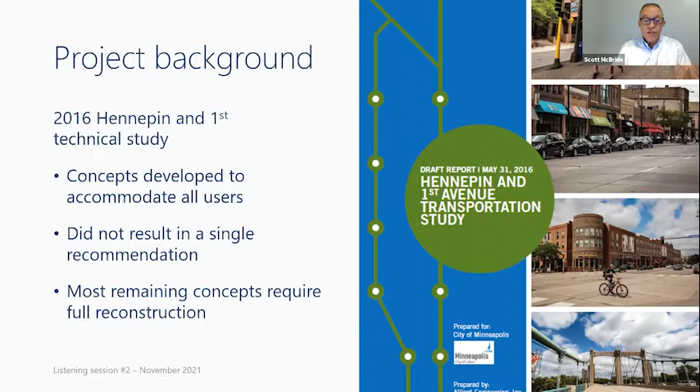Importantly, a lot of those concepts to do those full types of improvements would have required full reconstruction of both First and Hennepin in order to accommodate some of those bigger visions.

In 2018, the city and county moved forward with implementation of a bike lane on First and Hennepin. They requested and fortunately received $5.5 million in federal funding, looking at a 2023 fiscal year construction project. The scope of that successful funding application was to install bike lanes on First and Hennepin through this area, look at pedestrian improvements like bump outs, accessible pedestrian ramps, making sure it's ADA compliant, and look at traffic signal upgrades, replacing some of the aging traffic signals and including accessible pedestrian signals.

Importantly, the scope of this project that we're embarking on today is a retrofit. By that, I mean it's not a full reconstruction of the road. We will try to leave as much of the roadway intact as we can. It is to do these improvements: the bike lane, accessibility, and signal upgrades.

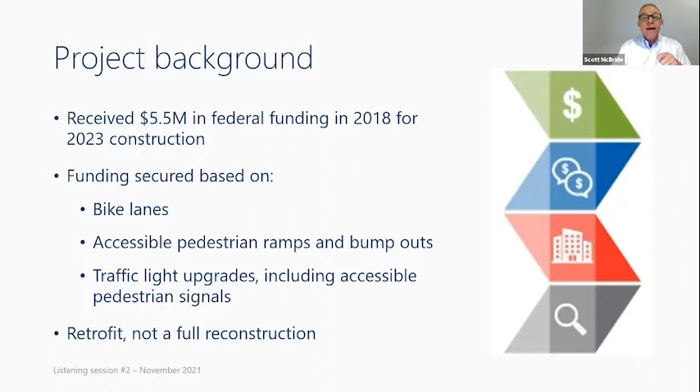So the project area that we're working in today, and that was part of that application, is First Avenue and Hennepin Avenue. You see the Mississippi River down on the bottom left corner of the photo, and in the top right where they come together is where First and Hennepin meet. The corridor area is on First Avenue and Hennepin Avenue from Main Street up to where it comes together, and then a little bit further to 8th Street.

I'm sure you all recognize that this really is quite a vibrant, robust corridor. It's really the gateway to Northeast and the northern suburbs coming out of downtown Minneapolis. There's a lot of local, regional, and statewide transportation connections that happen here, in all modes: walking, transit, biking, automobiles.

And since the last open house that we had, this is our second listening session, we've actually added an element. You see the yellow line down on Main Street at the bottom left of the map. In cooperation with the Park Board, Minneapolis Park and Rec Board, Hennepin County has agreed to undertake construction of the 'seam' project as part of this. There's a gap in the trail system in that one block stretch between First and Hennepin, and so we're currently working with the Park Board to add that to this project. I think that's a real benefit and a good example of cooperation between agencies to get something done.

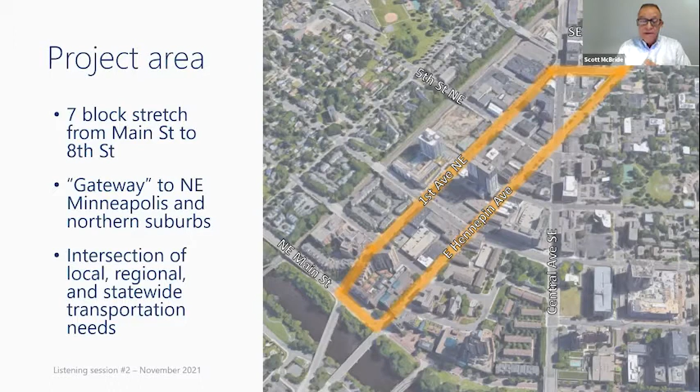So our project is more limited in scope than the 2016 effort, and that is to be consistent with the requirements of the Federal Highway Administration that administers the funding we've received for this project. We have explored a range of options that meet those requirements, but I do want to note that it is currently limited, again, because it's more of a retrofit project as opposed to a full reconstruction project.

We are launching right now about a 30-day engagement window where we'll tell people what the alternatives are, the two options that we have, and get feedback on those for the next 30 days. At the end of that, we'll look at selecting one of those alternatives based on that feedback, and then move into a little bit more preliminary design.

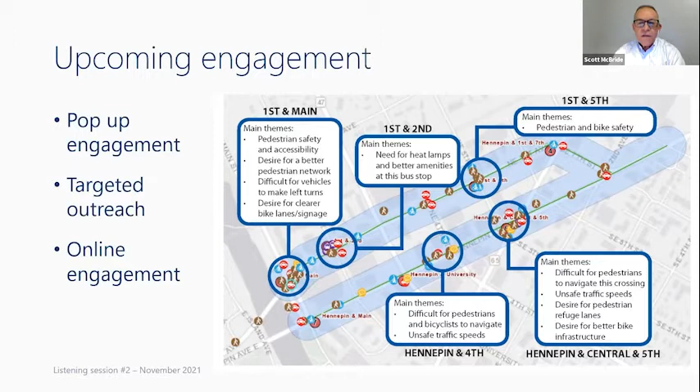No, looks like Haila froze. All right, looks like we lost her. I'm going to pull the presentation up and see if we can carry on. Okay, I think Haila got through that one.

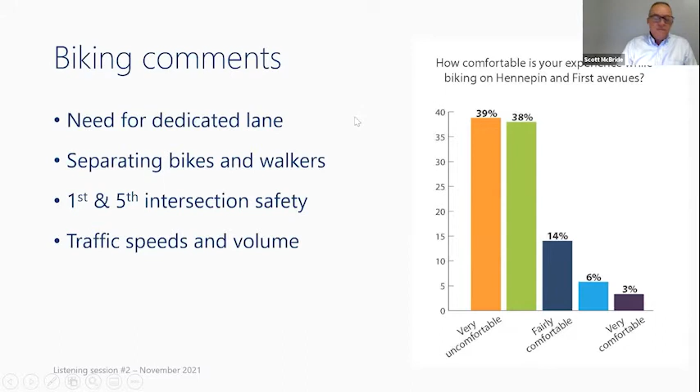Hey, Scott, for biking, are you back? I'm back, sorry about that, my internet must have dropped. It's wonderful you were able to jump in so quickly. No worries, you want to take over? Sure, I am sorry about that folks, I guess we had an internet hiccup here. Yes, that is life in the digital world indeed right now. Looks like there's a question in the chat, I'm sure someone can look at that.

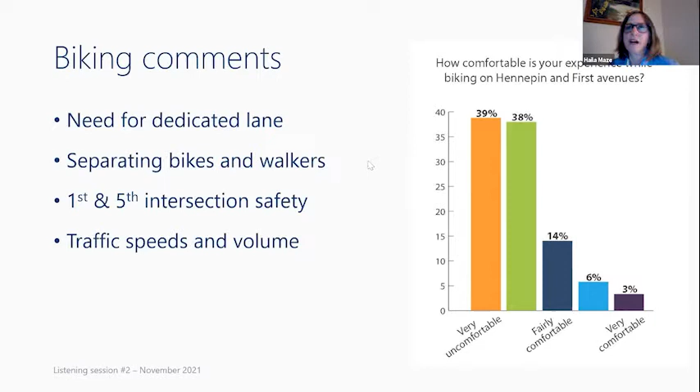I'll go ahead, as I think Scott ably jumped in and talked about walking comments. Likewise, we asked about comfort level and need for biking. One thing we found pretty consistently is nobody is super comfortable on this corridor, which doesn't surprise us. We heard consistently a need for a dedicated lane, for multiple reasons: bikes in traffic is unsafe, and bikes on sidewalks with pedestrians is also unsafe, more so for pedestrians than bicyclists. Separating bikes and walkers was key, especially in busy commercial districts. It's very common, as it is here, for bikes to be on sidewalks, even though it's technically illegal, due to safety concerns. We heard a lot about the 1st and 5th intersection, not just from bikes but also from pedestrians, being an unsafe intersection to navigate due to lack of traffic control, and uncertainties about traffic speeds and volumes also being a high consideration for people biking this corridor.

Driving comments: there's concern about bad sight lines, especially at the skewed intersections we'll talk about later. There's a need to ensure people have a good view when traveling through the corridor. Traffic flow and speeding are considerations, both speeds too fast and traffic operational issues with some signals at key intersections, which anyone who's driven through here can appreciate. Some confusion with intersections, especially around the triangle, and we have proposed solutions for that, along with traffic signal timing—it can be a little stop and go with various bottlenecks forming in the area.

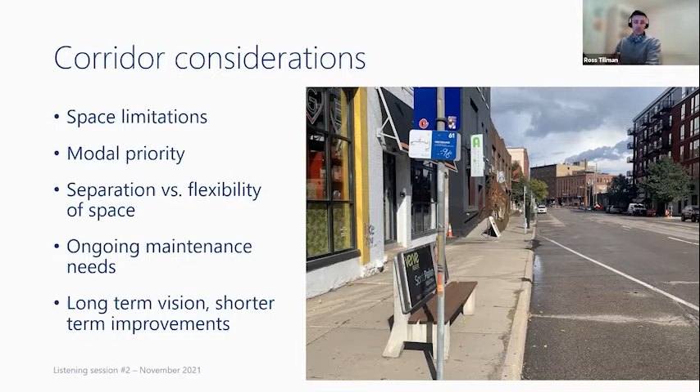From a corridor overall considerations perspective, these items probably shouldn't be a surprise to those of you who live in the area, but there's obviously space limitations in an urban area with different modal priorities. So we worked through how do we fit these different modes into the corridors, how do they work together, is there physical separation or more flexibility of use of space. We've considered ongoing maintenance needs as well. And a key thought has been thinking about what we can do now as a retrofit project, and how that project can not preclude other things from happening in the future.

The first is the one-way versus two-way roadway facility component. The key issue is how can one-way roadways be safe and livable? The two concepts we're sharing today retain the one-way paired roadway facilities, and we've thought about how to improve accessibility. Scott mentioned ADA and different pedestrian components. We're talking about adding a bikeway, and traffic calming certainly fits into that space of safety and livability.

So our concepts have narrow lanes. We're proposing removing some channelized right turns on First Avenue, and curb extensions where we can. Many of those improvements also address pedestrian safety. We also have a concept to share at the triangle intersection that checks that box as well. And then streetscape enhancements - that's an ongoing conversation, and right now we're looking for feedback from you all on what could be out here.

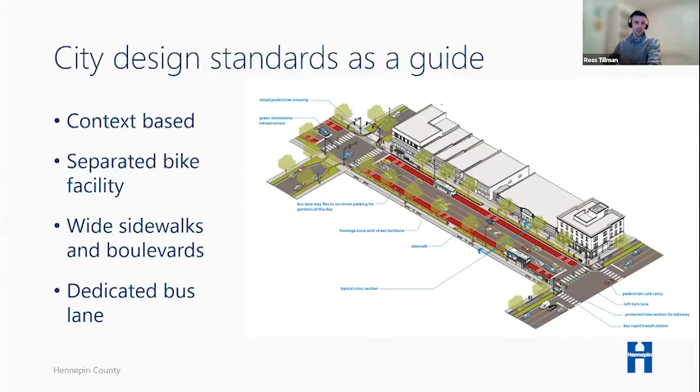The regional trail connection - Hyla mentioned this and Scott did too, I believe. Since we last met, an issue came up about completing a gap in the regional riverfront trail along the Mississippi River. Right now there's a gap along Main Street between First and Hennepin where that trail does not exist. So in partnership with the park board, this project is incorporating what's being called the seam connection. The intent is to include a two-way multi-use facility on the river side of Main Street on that block to provide regional and local connectivity and circulation.

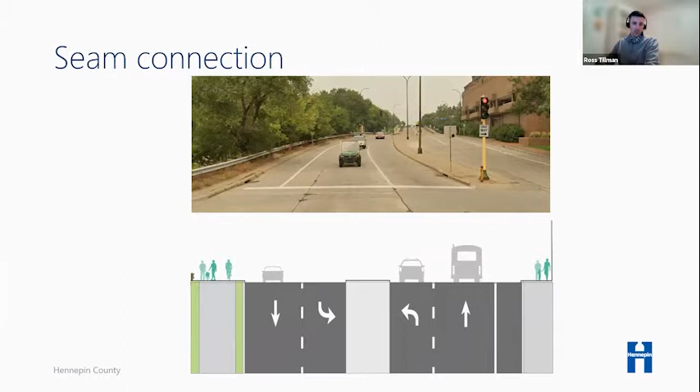Green infrastructure is another key topic - this is something we're considering now. We have some ideas on how to make the corridor greener and what those options could look like independently. Where we're going with that now is figuring out where those can be located as far as space goes on the corridor options, and working with partners to figure out the details. From a stormwater treatment enhancement perspective, that's certainly key here. Different plantings are being considered, and we're working in partnership with the watershed agency to get their feedback and also potential funding as well.

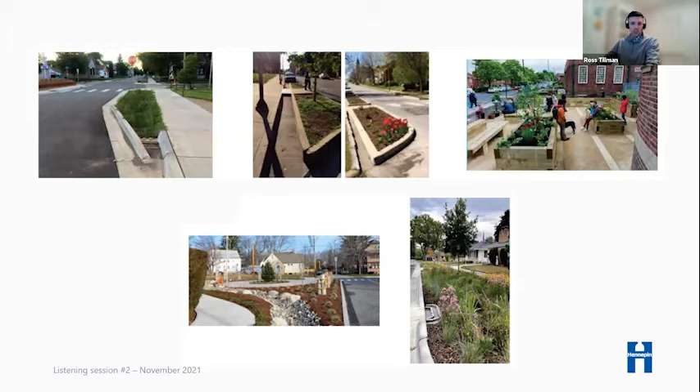We did talk about this at the first listening session at a higher level, not necessarily the specific concept, but the fact that it is a known issue. The triangle is the intersection between Hennepin, Central, and Fifth. There's essentially three signalized intersections operating more or less as one, and the main issue was how do we improve the safety and accessibility of that triangle intersection.

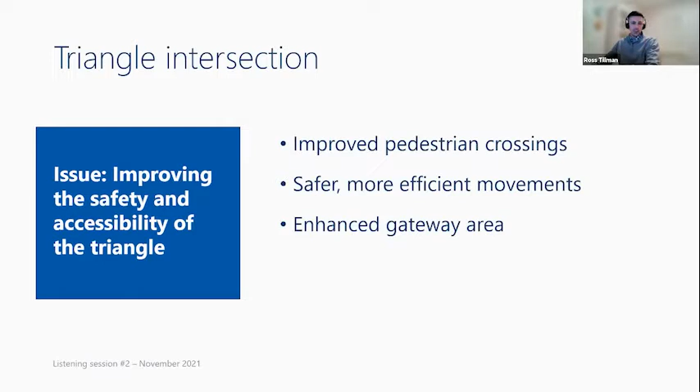What we'll show next is our take on a concept to do that, where we can improve pedestrian crossings, have safer and more efficient movements for all modes, and even provide a potential enhanced gateway feature area.

This is a very complicated intersection. There's a lot of different conflicts, a lot of different paths for vehicles, pedestrians, and bicyclists to take. Doing this, putting the triangle through 5th Street, alleviates a lot of those conflicts.

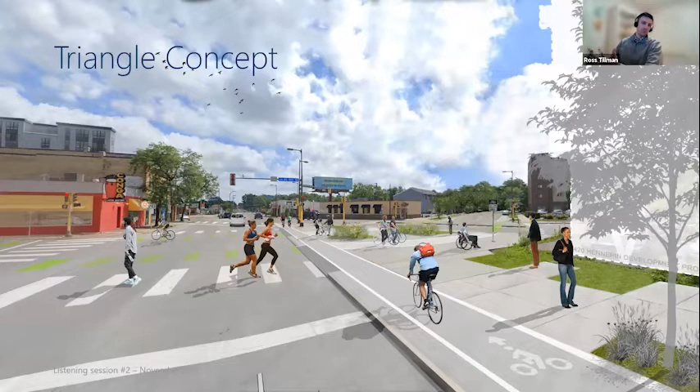Here's a rendering of what this could look like. Just a couple notes on this: that Hennepin development building profile is the white blob on the right, and this is just a take on what it could look like. One of the key things we're looking for feedback on today is the streetscaping side of things, the green infrastructure. So what's shown here in the rendering is not intended to be exactly what's built.

It's just an idea of what we could do as far as a visualization goes. Again, the intent here is to provide a nice plaza area for pedestrians and bicyclists as they're crossing 5th, or if they're traveling along Hennepin or Central, to stop at. It could be a gateway feature for the neighborhood or community, and just provides an added layer of safety for those users.

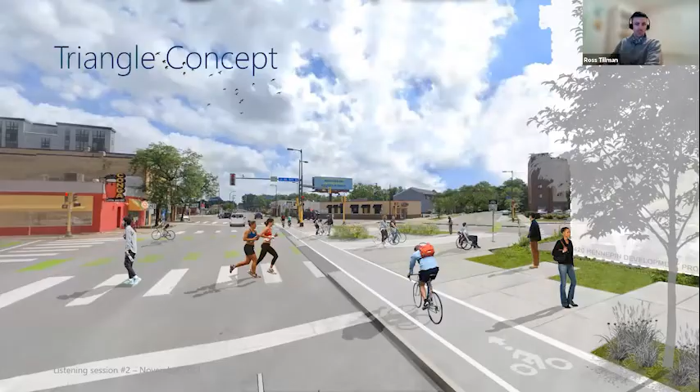I mentioned the intersection is quite complex, and I think everyone's aware of that if you travel through it. Currently, there's quite a few different conflict points for vehicles. When we talk about conflict points, it's where collisions could occur, where paths cross each other. Right now there's 58 motor vehicle conflict points. That proposed solution drops it down to 16 — quite the reduction in conflicts, 72%. That would lead to a reduced amount of crashes.

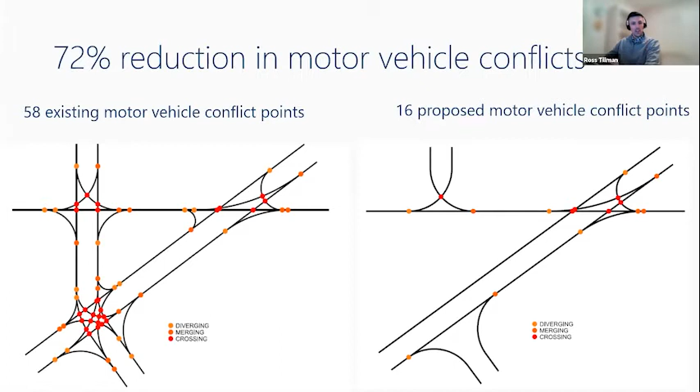On the pedestrian side, again, we're looking at conflicts and those reductions. There's currently 35 pedestrian conflict points. That would get down to 21 with this improvement in place — a 40% reduction. So again, we're making it easier to cross, there's less potential conflicts to be aware of. And if you're biking through the intersection, it's certainly going to be safer as well. The amount of conflict points just depends on how you're riding the intersection, so probably somewhere in between as far as the reduction goes, but certainly an improvement for bicyclists as well.

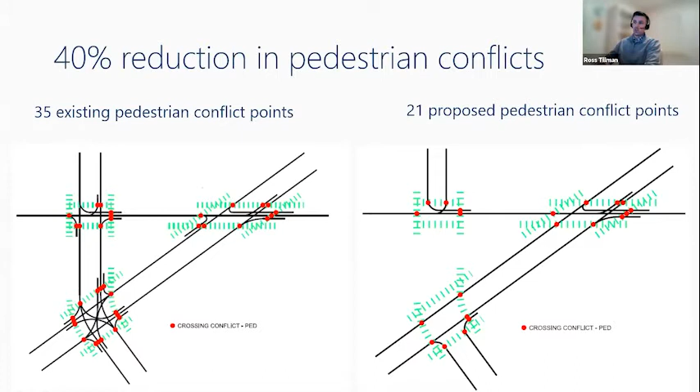Managing curbside space — how do we effectively balance demands for curbside space? Things we're talking about in our concepts are transit facilities, whether that's stations or transit lanes, on-street parking in the area, and drop off, loading, and deliveries as well.

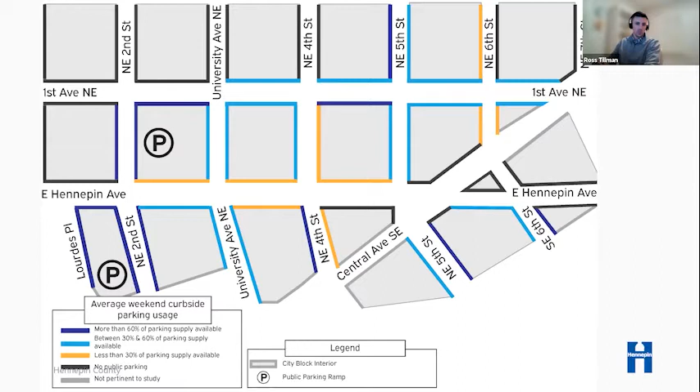And the last key topic here was accommodating transit. So we talked about E-line BRT. Scott mentioned the construction years overlap, that's coming through this corridor. There will be 2 stations within this corridor, both at Second. So University and Second, and First and Second, or Hennepin and Second and First and Second, excuse me.

Next slide. And just an FYI slide for those who haven't seen a BRT station before. This just gives you an idea of what above ground elements are typically part of those stations. So again, First and Second and Hennepin and Second is where the BRT stations will be.

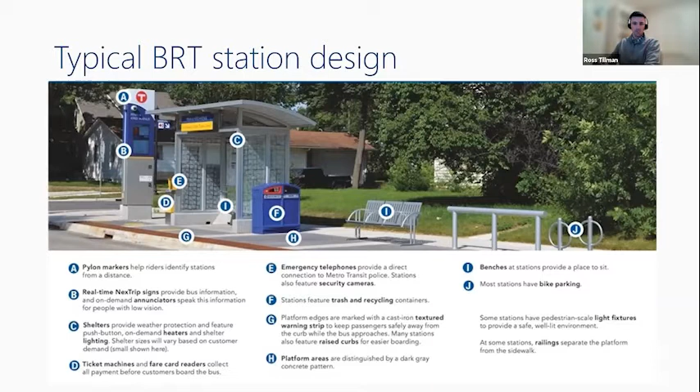All right, now finally getting to the concept. So all that taken into account, how do we optimize benefits within the scope we have? And we're looking at, of course, adding the bike facility, curbside management is key, integrating transit, and providing that long-term flexibility again.

As we developed our concepts, we did account for a variety of different criteria that we use to evaluate these, and we'll share that evaluation at the end here. These 8 criteria encompass a wide realm of different topics, but focusing on health and safety for pedestrians, bicyclists, transit users, the business district, motor vehicles, and also just making sure that the concept is not only sustainable, but something that's implementable as well.

All right, so what we're going to show here are the cross sections of our different concepts. Just a side note, these are shown on Hennepin Second to University. There really isn't a lot of typical sections along these corridors, it changes quite a bit. So the layouts, of course, show the full picture a little bit more clearly, but this is showing the general nature of the concept. So existing 3 travel lanes in each direction, 2 parking lanes, so 1 on each side, and of course, no bike facility. In this area, there's about 12 feet of sidewalk space behind both curbs on each side.

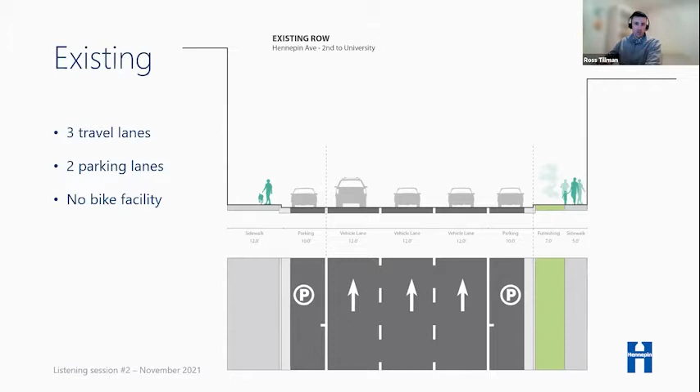Next slide. So concept 1 we have here, this is more or less in line with the federal funding application that was prepared, and our team took that concept and put a little more detail and thought into it for concept 1. That retains 3 travel lanes. 1 parking lane is retained on the left side. For the most part, the parking on the right side is removed for installation of the bike lane. So in this case, the bike lane is a street level bike lane that's buffered from vehicle traffic.

And on the next slide, we have a rendering of what this could look like, again in that same area of the corridor. You'll see those 3 travel lanes and the bike lane against the right curb with that paint buffer. Next slide.

So I mentioned we did look at utilization for parking, of course, with this concept here, with the bikeway on the right side, that does impact parking. You'll see here on the map the locations where parking is lost. I see there was a comment about that. This equates to 72 stalls on street between Hennepin and First, that's about 15% of the on-street parking stalls in this general area. So that area is along both Hennepin and First, and then those cross streets that have good access as well.

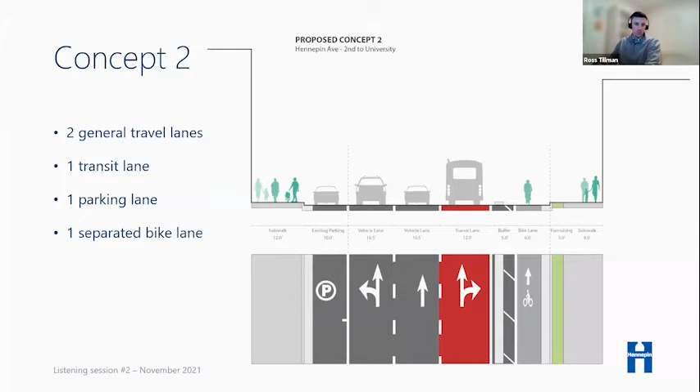Concept 2, this one's a little bit different. It retains 2 general travel lanes. The rightmost lane is converted to a transit lane and/or a lane where people can turn right from. 1 parking lane again is retained on the left side, and on the right side where parking was, a separated bike lane is proposed. If you skip to the rendering highlight, I think it shows that a little more clearly what that bike lane and the separation could look like. In this case, there'd be some sort of curb separation, a vertical element with the transit lane immediately to the left, and then the 2 travel lanes.

Similar to concept 1, this concept also results in parking loss on Hennepin and First. This one's slightly more, it's 86 stalls. There's a couple areas where having that physical barrier between the bike lane and the transit lane prevents parking, where concept 1 could retain it.

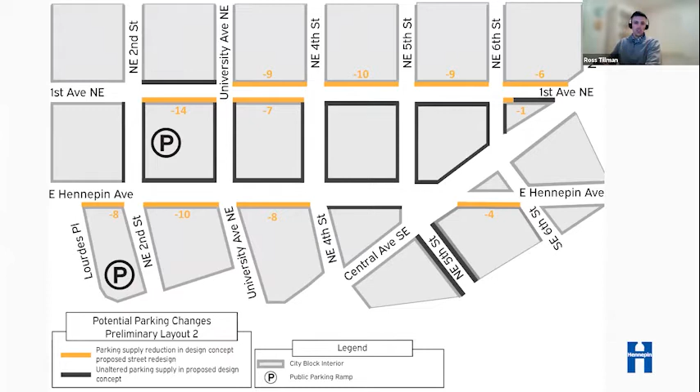So 86 stalls lost, that's about 17% stall loss for on-street parking in the area. To sum it all up, our team prepared an evaluation. This is a summary of that evaluation. Again, those 8 goals are on the left, and then we have concept 1, concept 2, as well as no build, so the existing situation out there now. I'll run through each one and explain the differentiators and why the rankings are such.

From an equity, health, and safety perspective, both concept 1 and 2 certainly enhance ped facilities and install bike facilities. Concept 2 has what we'd consider a better, more robust bike facility constructed. It also provides more transit advantages through reliability with the transit lane. So those align with agency goals and policies.

On the pedestrian facility side, both concept 1 and 2 incorporate ADA compliance, curb extensions, accessible pedestrian signals, the triangle improvements we showed, and channelized right turn lane removals that I mentioned. We're also proposing adding sidewalk on the north side of Hennepin between Main and 2nd. All that is in both of our concepts, so both got the same good ranking.

On the bike infrastructure side, as I mentioned, concept 2 has that separated bike facility, whereas concept 1 has that buffered on-street bike facility. From our perspective, in the context of this corridor, for people of all ages and abilities, that separation is key. So that received a good ranking versus fair for concept 1.

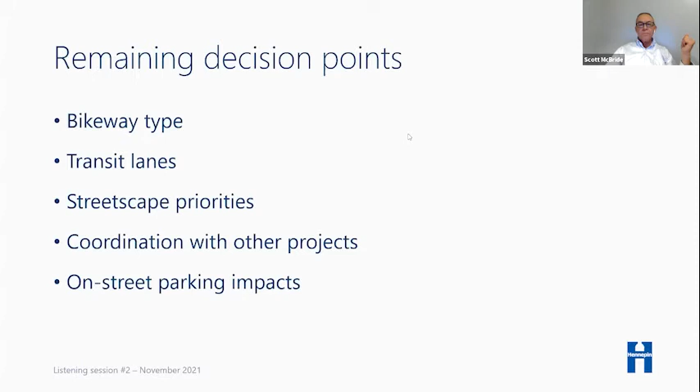20 minutes is clearly not enough time to work through all these complex issues, is it?

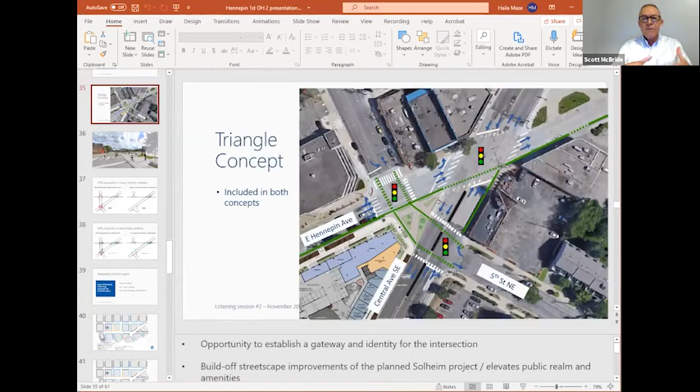We might get some help from my friends on the call here, but essentially what we did is, as we started to generate ideas for this, we came up with this idea of closing off Fifth Street there, kind of putting that triangle - we called it the triangle triage, because it's such a hard intersection. We looked at that first and said, okay, if we close Fifth, what needs to happen at that point?

So we threw out some ideas about Fifth to the west of this intersection. It could function as a two-way, right-in-right-out type situation, or it could also function as a one-way, which might allow for a little more pedestrian realm, possibly even more parking. It's just an idea at this point; we haven't fully vetted it with the owners around that area, so there's more to be said on that.

Josh or Ross, want to add anything? Yeah, I think you summarized it well. I'll add that one reason one-way came up is balance—we recognize adjusting the street network can shift traffic elsewhere, and that's something we'd look at further. But one benefit of making it one-way would be additional parking on Fifth, possibly angled street parking, which could mitigate some of the parking impacts occurring on Hennepin and First.

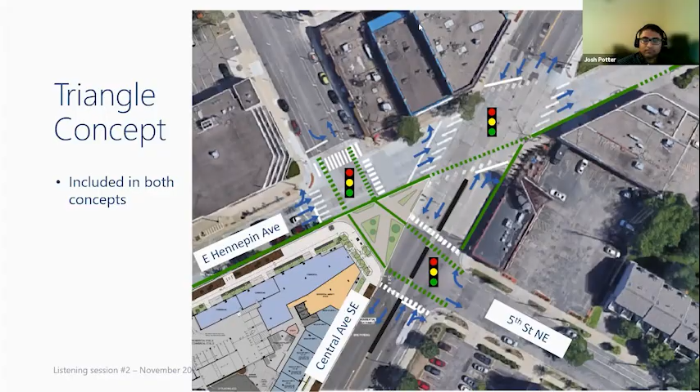I'll add one more thing. That conversation has spillover effects on the First and Fifth intersection as well. I know someone mentioned that's a safety hotspot—converting Fifth to one-way reduces a lot of conflicts there too. So we'd see positive safety improvements at the triangle that would spill over to First and Fifth. Just another consideration. And to be clear, the one-way we were looking at was headed westbound.

Thanks for those clarifications, Josh, Ross, Heather. Does that answer your question, Scott? Okay, thanks. Go ahead, John.

Sorry, thank you. The plans are out there, and I'm concerned they were posted a couple weeks ago but weren't shown here tonight—you'd have had to already get into the plan to look at the details. I expected this listening session to run through where we are, because tonight felt like we were a year ago, talking ideas and concepts instead of getting down to a plan level. Kudos to those who did get into that, but I'm concerned there are a number of elements made to the plans, and it's competing.